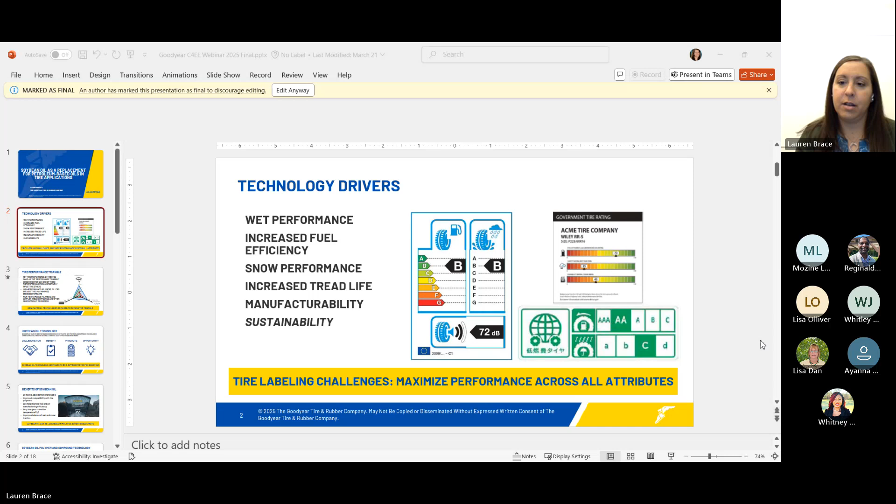Understood. So, all right, let me get back to sharing. Okay, are you back to the slideshow? Okay Whitney? Yep, it's perfect. Okay, all right, thanks, okay.

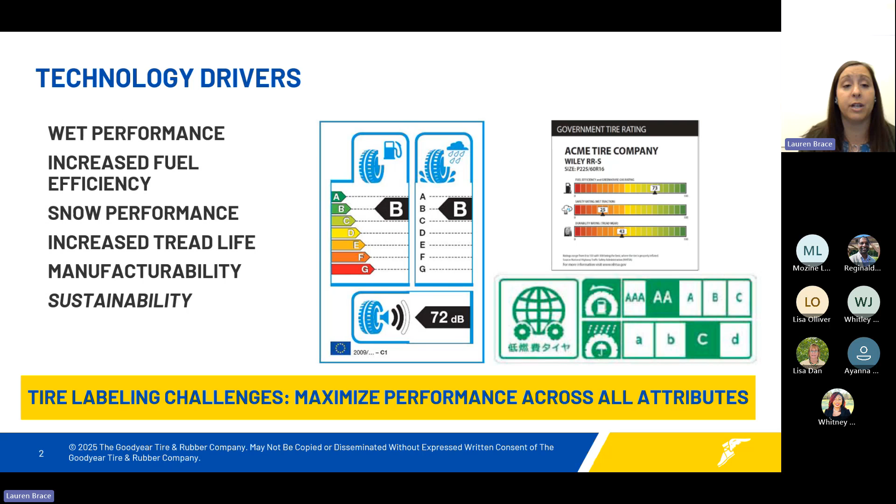So hopefully, I'm not sure how much of that you heard, but the goal really of any new tire development is to maximize performances across all of the different performance attributes as best as you can. But typically that's easier said than done. Typically if you maximize one performance attribute, you're going to trade off in another. And so what we really want to figure out is how do we break those trade-offs?

So like I mentioned, if you're going to take three performance attributes, three of the most common ones are rolling resistance, which is what correlates to fuel economy, tread wear, how long your tires last, and then wet and dry performance. That's kind of self-explanatory, how well do you do on wet roads and dry roads. Those are three of the most important tire performance parameters globally across all different environments and usage conditions.

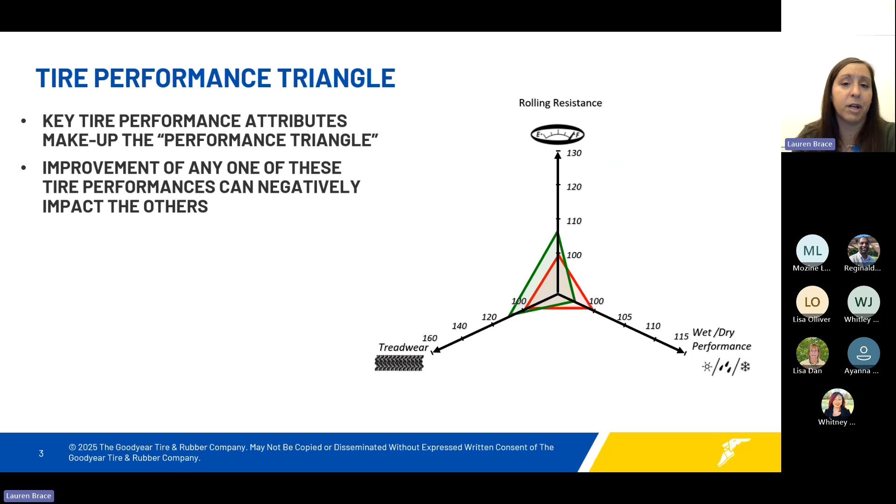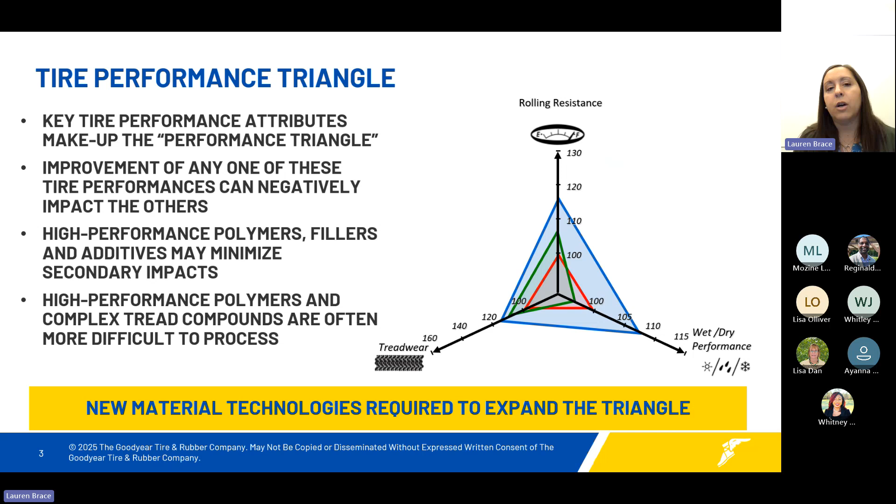If you're looking at a normalized rating of the performance, typically if you want to make something better, let's say we're going to make rolling resistance and tread wear better, we often give up on wet or dry performance. So how do you break that trade-off? You really have to look to new materials and new ways of compounding the rubbers in order to expand the triangle and break those performance trade-offs.

So enter soybean oil. This was something that Goodyear had been playing with for quite some time, actually since probably like 2010, mostly in race tires. We were doing some lab development, but it didn't really have a home in any of the products that we were making and selling to the masses. But we kept working on it, kept developing it, trying to figure out how to use it in a way that would be beneficial to the product performance on top of it being a sustainability attribute of its own.

Being a bio-based material, so what does it do for us? Obviously it's domestic, right, there are soybean fields all across the US. It rotates in with the corn. It is abundant, meaning it's actually in excess. So soybean oil is actually a byproduct of the soy protein harvesting, and so the oil is actually available in excess. So it's not taking food supply or anything away like that, because it is actually an excess product based off of the process that we go through to harvest the protein.

It's renewable, more of an energy play actually more so than just pure sustainability. So we know that it actually has an improved compatibility with tire polymers. The tire polymers that go into the rubber compounds actually like soybean oil better than they like petroleum oil. It has to do with how miscible and how similar the chemical structures are. So that actually helps us with our manufacturing efficiency, because if you have better compatibility with tire polymers, then you're going to have an easier to process material. So you do get a little bit of energy conservation as well, it's kind of an indirect benefit.

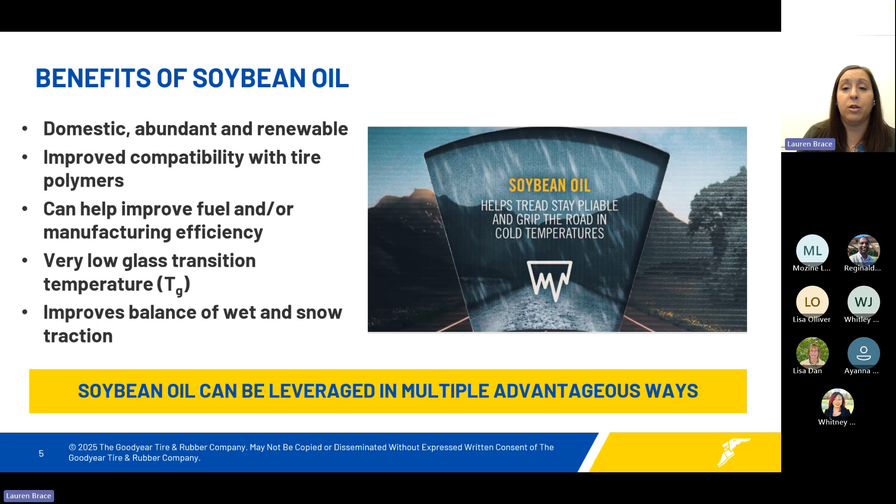The softer your compound, the better, because you really want to be able to grip the ice and the snow, and not just have a super glassy rubber block sliding on top of ice or snow. It's very similar to if anybody on the call has ever used winter tires and driven all-season or summer tires in the snow versus driving winter tires in the snow. It's a huge difference because of the pliability of the rubber.

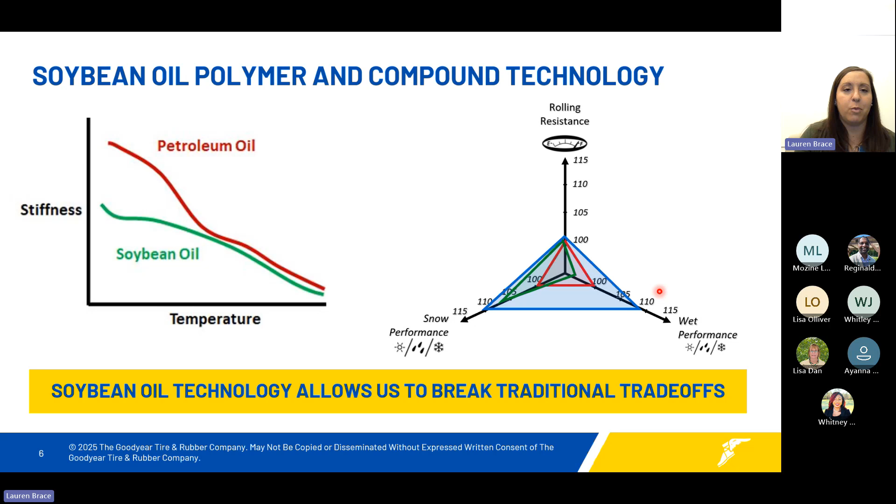We really started working on this probably in the 2010 timeframe. It wasn't until 2015 that we actually found a home for it in our products, and we started doing large-scale plant trials with it in product development. Since most of you are in North Carolina, we actually did the very first soybean oil trial in a regular Goodyear manufacturing plant, in our Fayetteville, North Carolina plant, in 2015. I was there, I actually did that myself. I've been tied to this topic for a while, so I did that myself back in 2015.

That was when we were starting to develop the original Assurance Weather Ready, which was launched in 2017. More recently, a successor got launched since I first talked to Whitney last year, in August at the conference we were at. The first one was awesome, but it was 8 years old, so it was time for its successor. We did launch Weather Ready 2 last fall, and that still contains soybean oil.

The original Weather Ready, after we launched it in 2017, was actually awarded the Tire Technology International 2018 Environmental Achievement of the Year for the use of soybean oil in that product. Hot on the heels of Weather Ready, we also launched Eagle Enforcer All Weather, which is really the police tire version of Assurance Weather Ready.

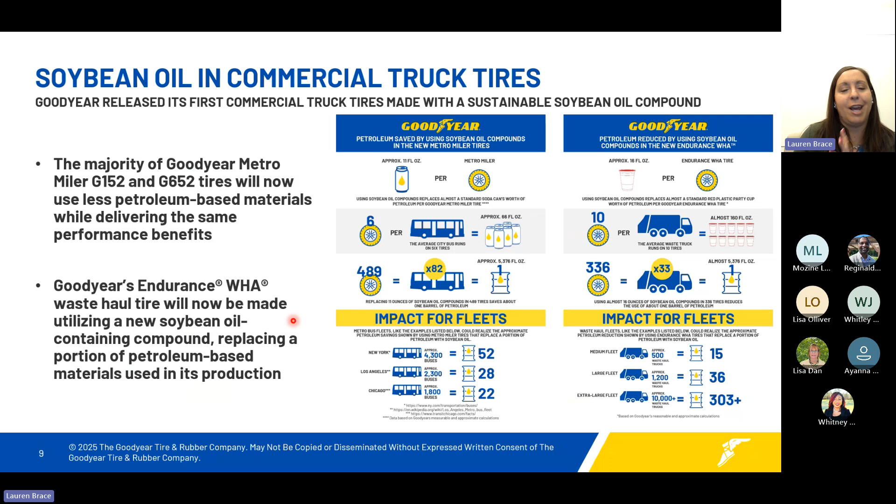Then the fleets were saying, this is great, but we also still have some consumer tires that we buy for a lot of vans and trucks and things like that. So we utilized that demand in our fleets to launch some of our Workhorse HT SKUs with soybean oil in them as well. These are highway tires for pickup trucks and vans.

Soybean oil is just one of many different attributes of Goodyear's sustainability strategy. Our corporate responsibility and sustainability strategy, we call that the Goodyear Better Future framework. This gets updated every year, and this is where our corporate responsibility report lives. If you look at Goodyear's corporate responsibility website, or just search Goodyear Better Future, you can get to it either way. You can find an updated report every year, and it's a big report. It's a fabulous read.

Yes, it's technical, but it's also easy to read at the same time. There are a lot of graphics, a lot of data. It really draws you in and keeps you interested versus being something super dry. So if you like to read up on what different companies are doing for sustainability, definitely check that out on our website. We update that every year, in the May-June timeframe. So if you look on our website now, it's actually the 2023 sustainability report, because we will be doing the 2024 one within the next couple of months.

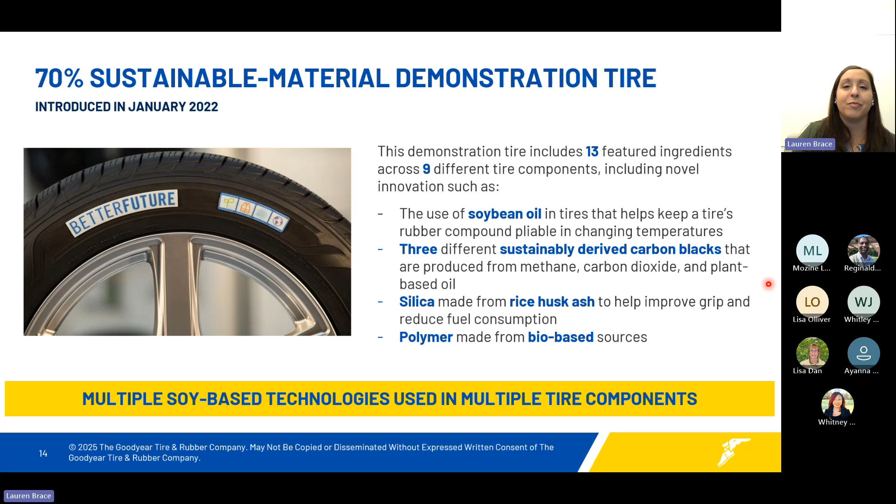So this was in January 2022, but obviously we have that 2030 goal, so we have to keep going. In January 2023, we introduced a 90% sustainable material demonstration tire. This now had 17 different ingredients across 12 different tire components.

Again, similar to the 70% tire, we had soybean oil, different carbon blacks from different non-conventional feedstocks, the rice husk ash silica. We also had biorenewable pine tree resin - resins that get put into tires to help with grip, especially in wet conditions. And then we also had recycled steel, and some mass balance polymers from bio and biocircular feedstock.

So again, this is a real tire. It passed all of the applicable regulatory and Goodyear internal testing to say yes, this is a tire that can drive on a car on the road. So while we did not sell them, this was a real demonstration that this is possible, and it does pass all of the required testing.

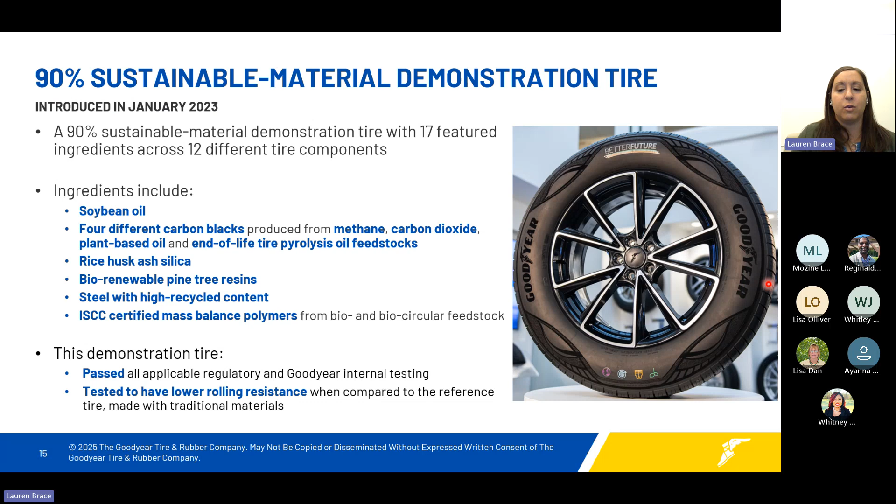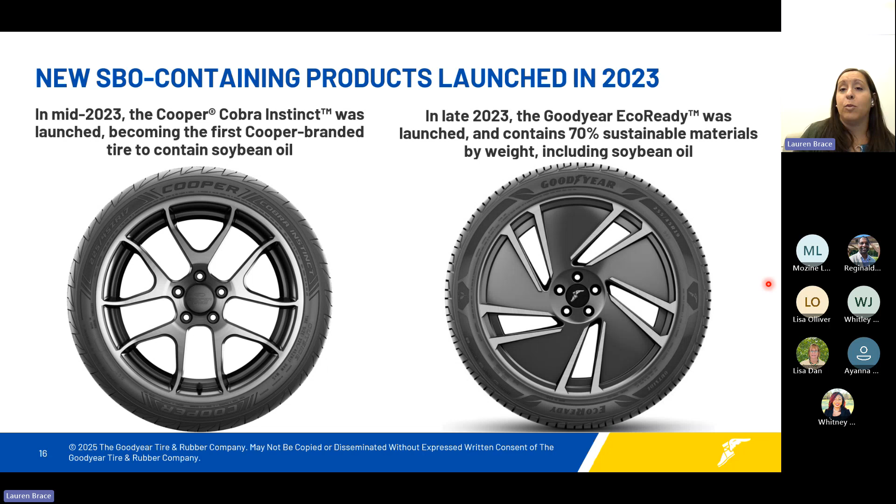Now, we did launch a couple of new soybean oil containing products in 2023. Keeping on, we launched our first Cooper branded product with soybean oil. For those who may or may not know, Goodyear purchased Cooper back in 2021, and we've been integrating our supply chains ever since. But then in late 2023, we did actually put up for sale a 70% sustainable material tire by weight, including soybean oil - the Goodyear Eco Ready. That's available in just a couple of sizes for EV fitments, but it is actually available on the market to purchase with 70% sustainable material content.

So looking forward, we have a lot of ambitions related to sustainability, trying to drive a better future for Goodyear and for the world. You may not think about the impact of tires on your daily life if you drive a car, ride a bus, or even fly in a plane, but they very much impact your life every day. There's many of them out in the world, so it's actually a huge sustainability benefit to keep working on things like this.

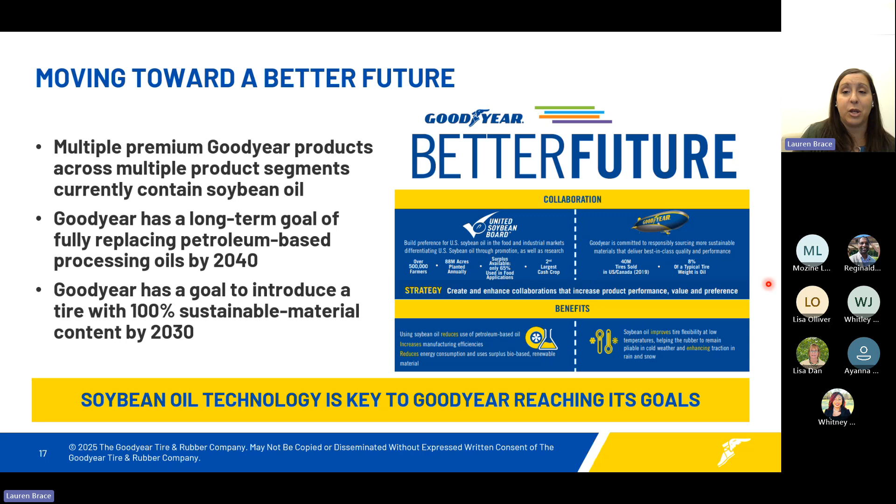Going back to soybean oil - we have a lot of different products now that contain soybean oil since we've been working on industrializing it in different products since 2017. We have that longer term goal of fully replacing all of our petroleum-based oils by 2040, and trying to introduce that 100% sustainable material content demo tire by 2030. So soybean oil is really central to that, along with a lot of other technologies.

So that is it from me. I wanted to make sure that we have plenty of time for questions, and I also didn't want to be too long and bore you to death because I realize it's the middle of the afternoon and we can get tired this time of day.